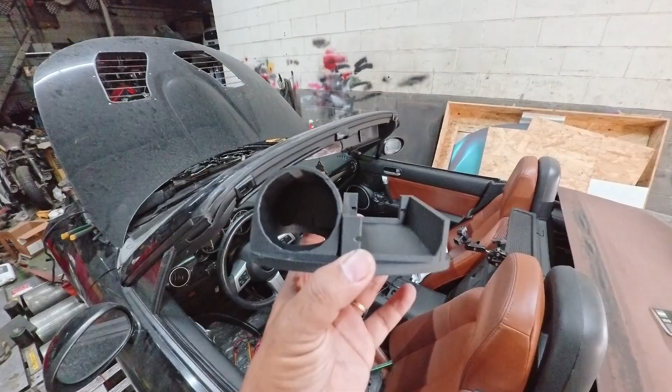Okay, so we have our 3D printed piece here, our prototype piece. Now, I do have a little bit of bad news. I did this all off camera already. And it's nothing too major here. So first I'm gonna tuck these wires down really quick here.

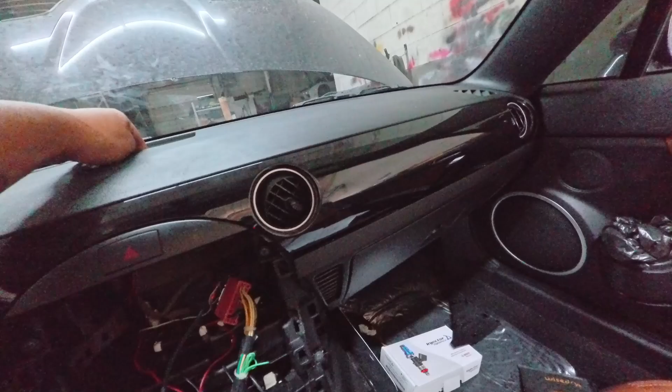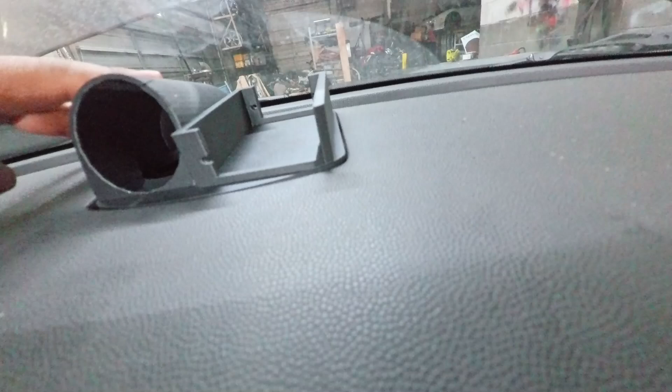And you can see that our base plate fits perfect in terms of the gap there. And I think we need to make it just a hair bigger. And the reason why is that if we make it a hair bigger, we can just kind of do a press fit here on the base.

So I think if we increase it like 0.5 millimeter all the way around, or at least just the sides, like this side and this side, we should be able to just kind of press fit this guy down. Because like I said, the last thing we want is when he's driving for it to do this number here.

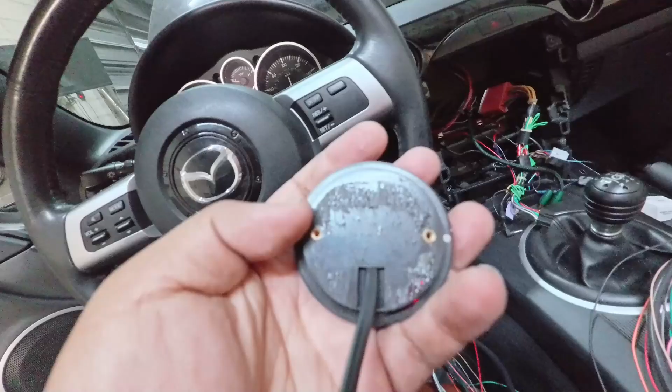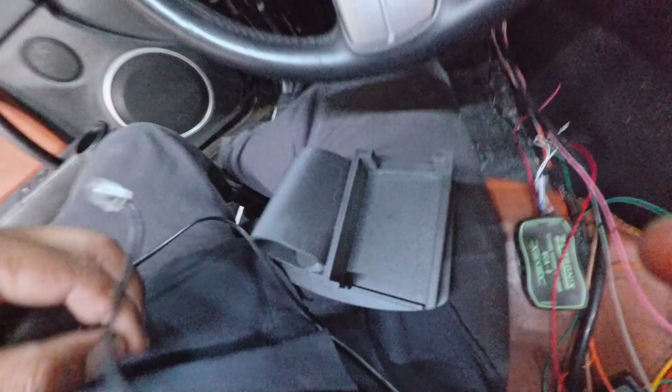The next thing is that what I did not account for is the stupid gauge itself. So the gauge itself has like a slight rise here over the face, and I've actually already broken our 3D print, unfortunately. I was hoping that I would have enough space to kind of massage it. So let me get this pulled in here, so you guys can see it for yourselves.

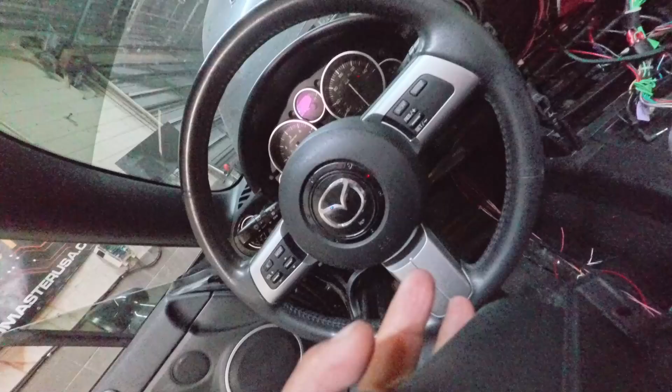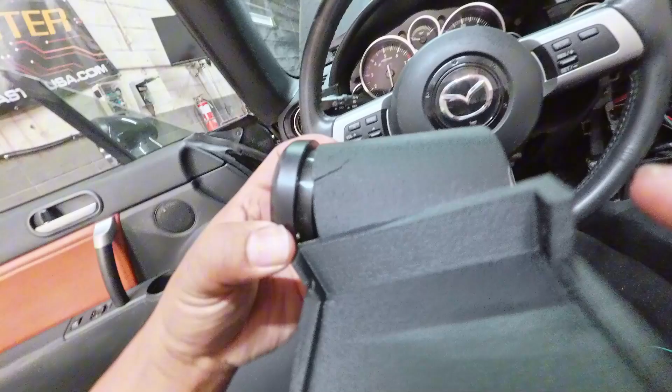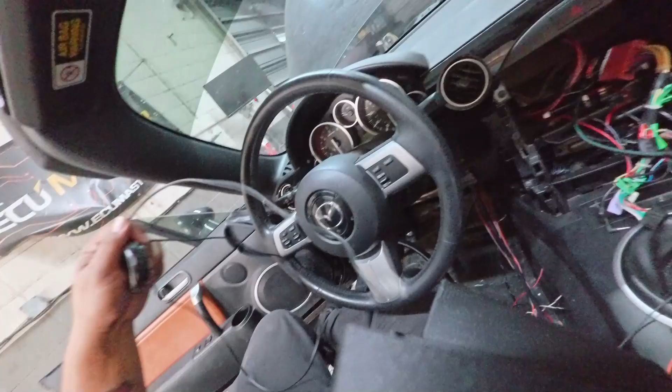And this is essentially what happens. So because this little bezel here sits basically right against this, we can't really get it to fit. See it? So I tried to jam it in there, knowing that I wouldn't have enough space, and I ended up cracking it a little bit. So not a big deal. Kind of sucks because I was hoping this would be good, but you know, it's part of this type of thing. Now the next thing is with the Cortex itself.

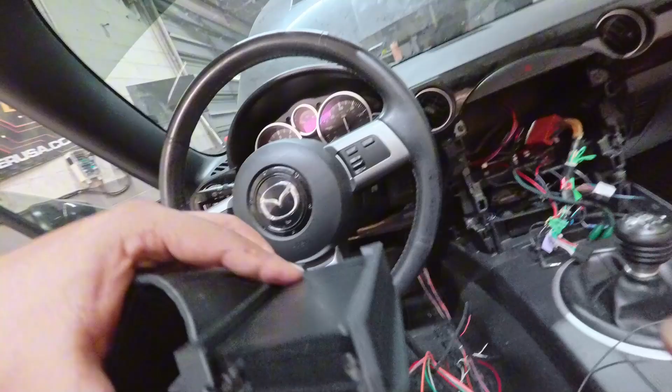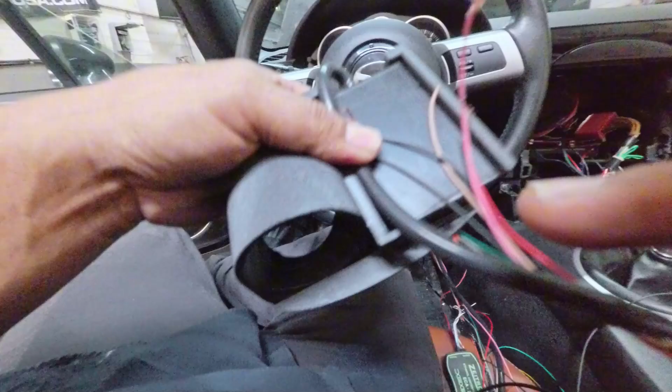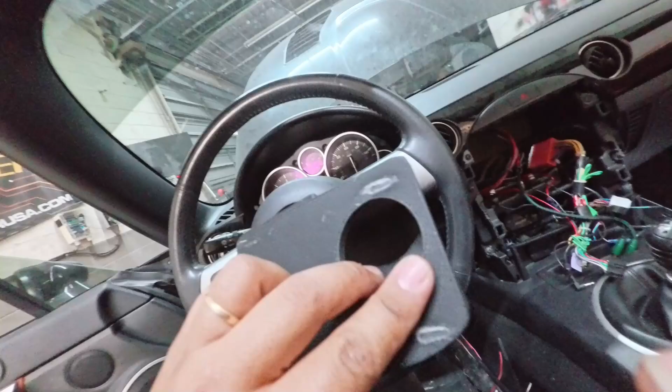So Cortex was actually designed to be a little bit loose, okay? And here's why. My initial thought was I was going to be able to take the hoses and kind of route them around this way. So with the Cortex pushed over completely to one side, I was hoping to be able to run the hoses through here and have a hole made on through here. That way I could feed the wires through the hole. So originally I was just gonna drill that.

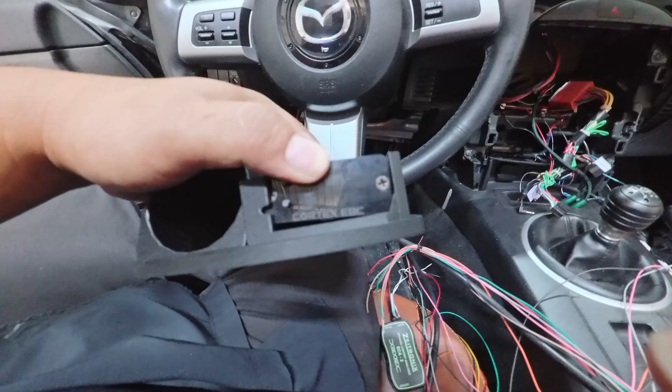The next thing though, is that the Cortex logo was designed to be double side taped, by the way. So I'm gonna raise the bed a little bit. That way we can just have the Cortex logo here. And I'm going to get rid of the screw hole here because it just doesn't look pretty. Originally, I was thinking that I could get a longer screw to kind of unscrew it and then screw it in so it secures in place. But I decided we're just going to double side tape it, and then that'll be that. So, unfortunately, it didn't pan out like what we thought.

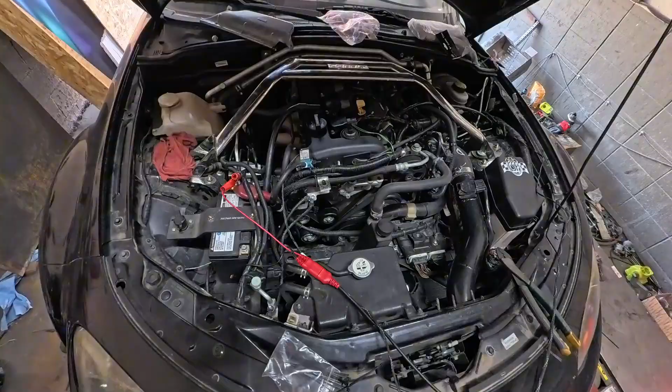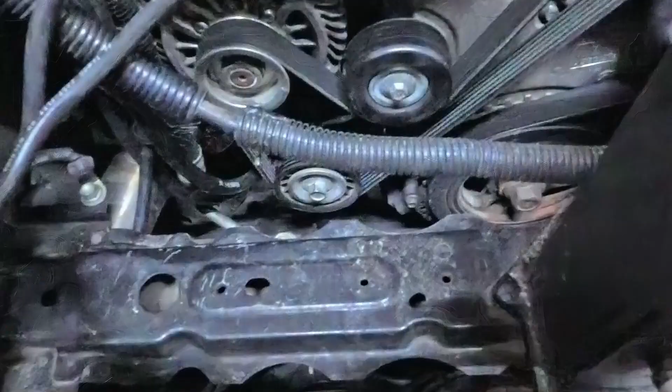So we got the boost control set up, kind of. It's just kind of sitting right here. I've got it zip tied to this harness right here. I don't know if that's going to be the end spot. I think we're going to leave that as is, but I'm just not really too happy about how close these hoses are down here next to the belt. We're probably gonna have to do some routing, check out the routing here.

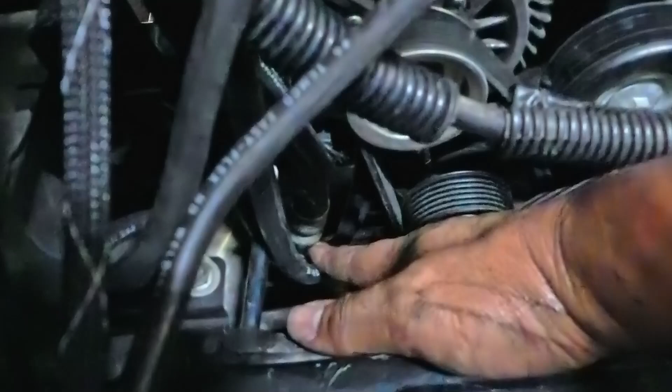So I'm just going to try to zip tie it for now to the AC line over here and see if we can keep it from moving. I'll see if we can reroute this a little bit though, but I'm just not too thrilled about where we can put this. So the hoses are currently pretty long, I think, and hopefully that will give us a little bit of adjustability down the line once we figure out where this all needs to go.

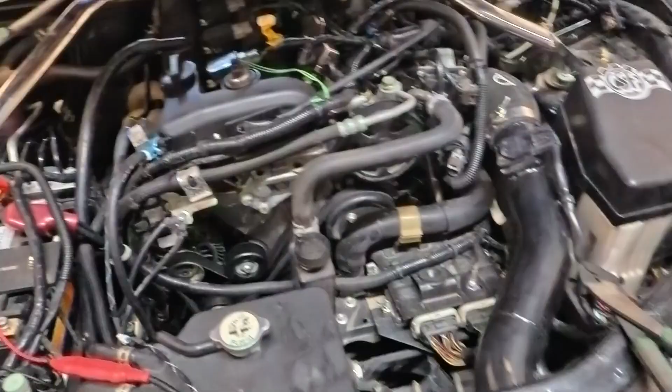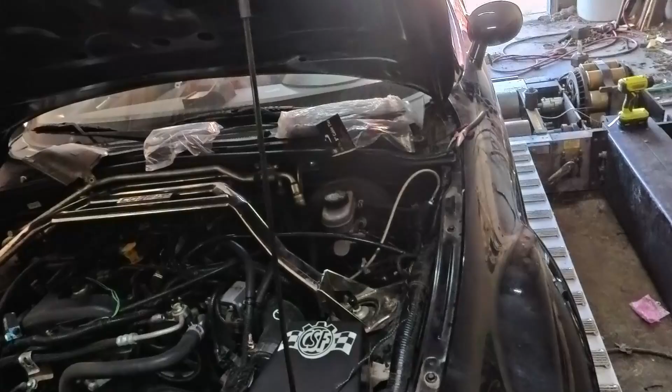I haven't actually fully read the software here, to be frank with you guys, for the Cortex stuff. So I'm gonna go brush up on that before I start doing anything crazy. I did find out that it does have like a boost limiter on it. And the boost limiter, I'm pretty sure, is just gonna cut the wastegate duty cycle to wastegate pressure, which works out pretty good too.

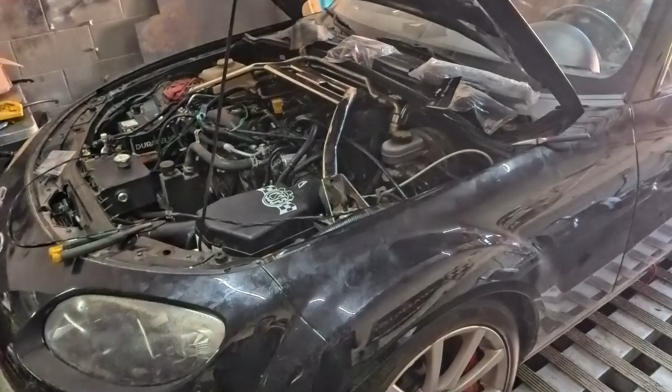I really like that rather than having a hard cut, because what happens, I believe anyways, is that if your boost target is say 20 for instance, and you hit 21, it should just drop the wastegate duty to 0, and then you should get whatever the wastegate is. And on this car it's 11.5, I think.

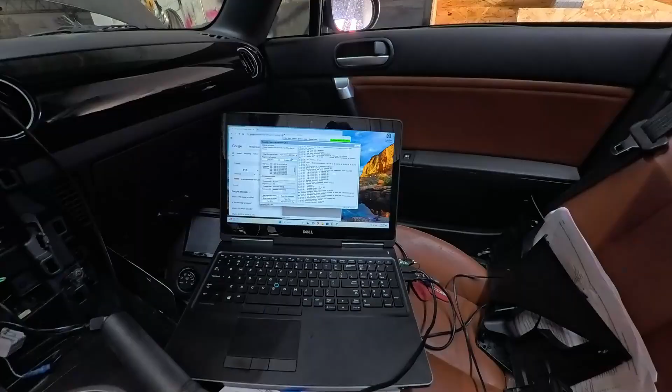But yeah, so hardware wise, it's basically hooked up. I'm going to kind of brush over the manual really quick here. And then if everything goes well, we'll be able to do at least 1 or 2 hits before the day's out. So we've made some changes for flex fuel over here. We're gonna have the EcuTek have a boost limiter as well, just to be on the safe side, since we haven't messed with the Cortex stuff just yet.

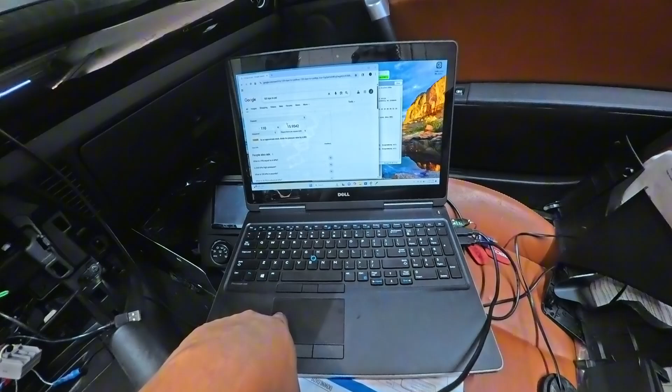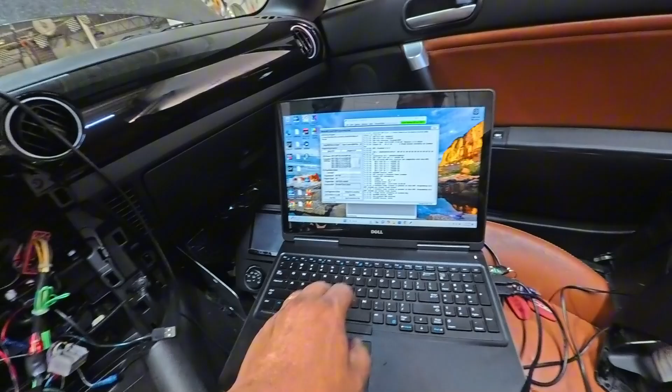So I have it set at 16 psi essentially. 16 psi is what we should be targeting, and then we actually have our boost cut at like 17 psi. So we have our boost cut at 120 kPa, which works out to 17.5 psi. I do also have the failsafe set up here as well, so if it exceeds 15 psi, it should drop the duty cycle back down.

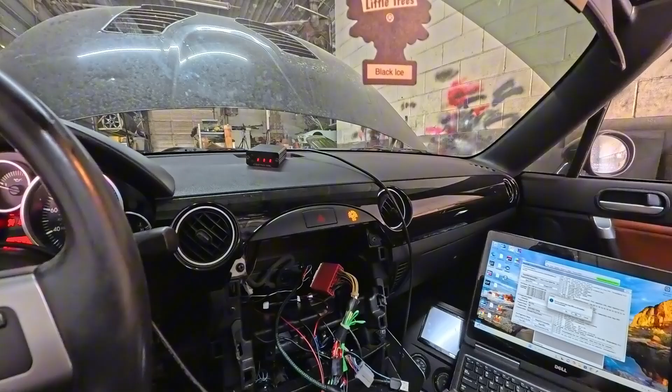So right now we have the wastegate duty cycle to add just 20% duty, and it shouldn't even make that much of a change. Now the wastegate spring is, I believe, 11.5. So at this point, we're adding 20% duty. Let's see what it nets us, and then we will be logging on both sides. So we'll log over here, and we're going to be logging on the EcuTek side, and hopefully everything works out pretty good.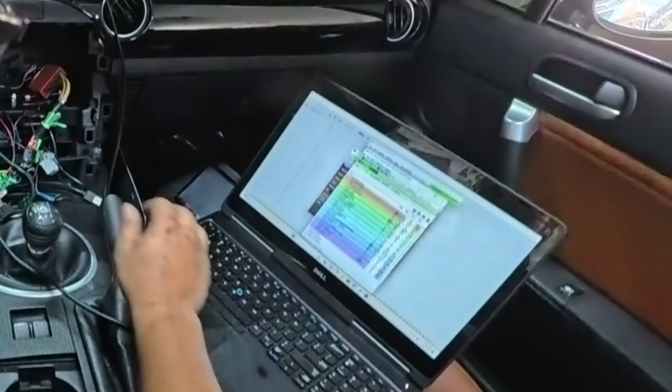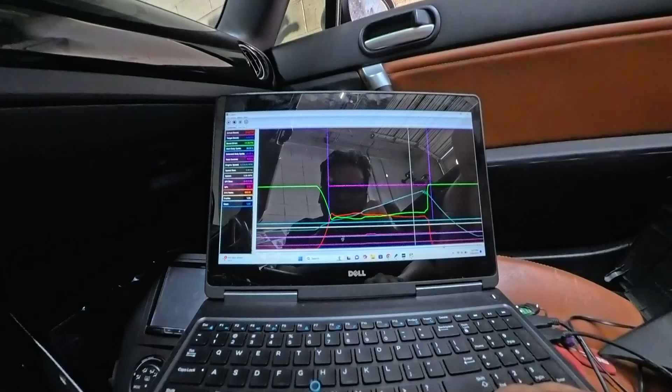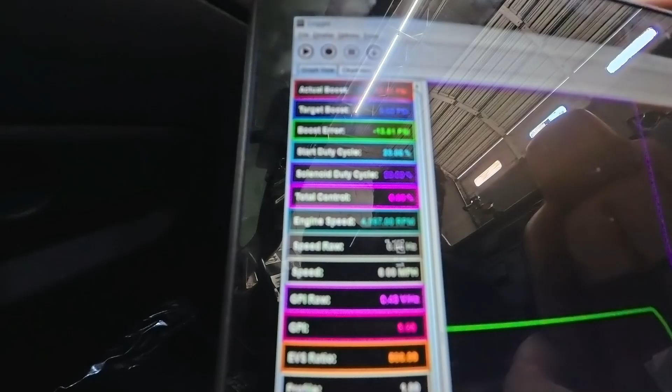All right, so we're not looking for power right now. We're just looking for boost control functionality. So what we've got here is that we're running 20% duty cycle all the way through. Right now we're in open loop. We're just trying to get this dialed in. We're trying to hit 15 psi. Right now I think our max was like 14. So we're getting more boost than where we were at before. That's obviously not uncommon here because we're turning it up.

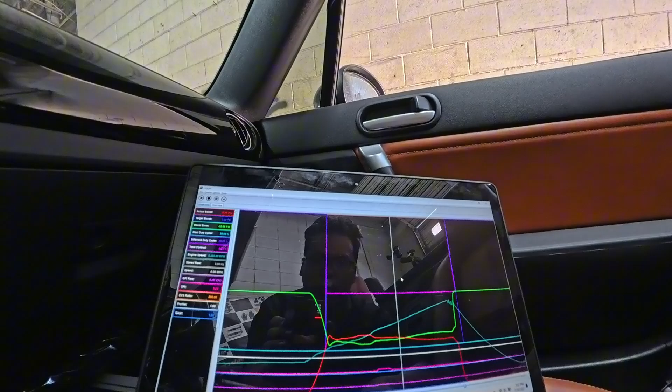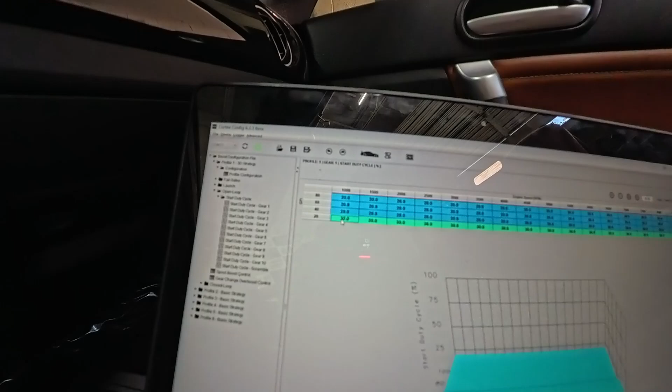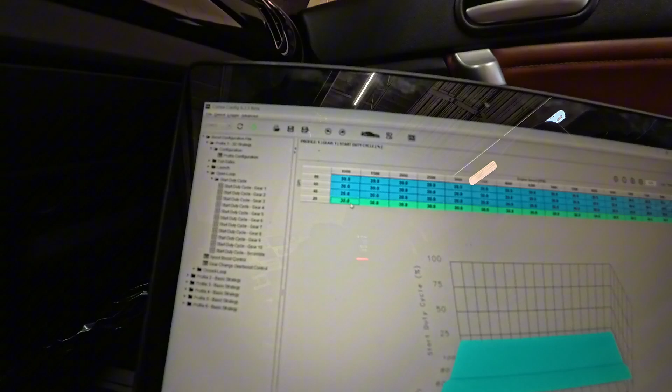So we've added 10% more to give us a 30% total. So if you look here, we've added 10% more duty onto this table here. On the left hand side, this is our ethanol content. So E20 and below, which we're obviously at E10, it should only add 30% duty cycle. So I've already flashed that back on. We're gonna give that another shot.

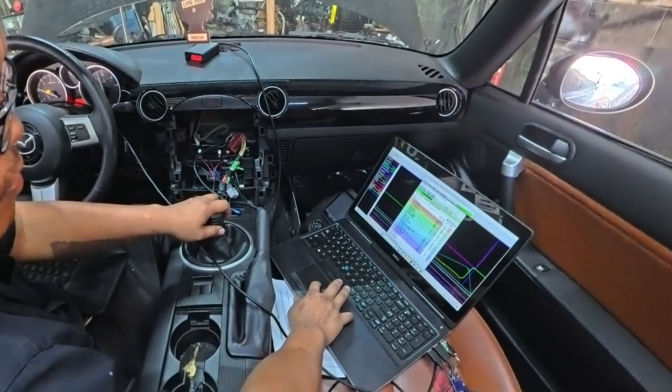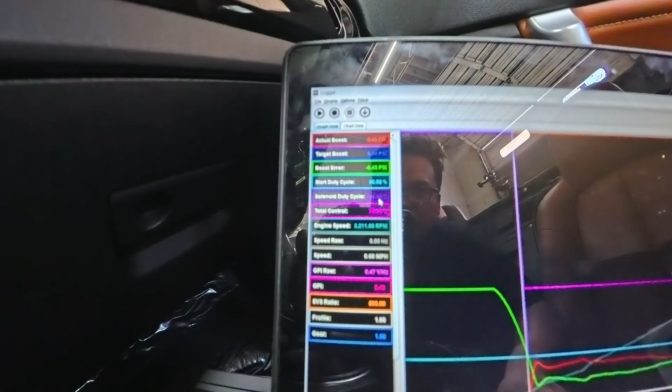So that last run netted us about a peak of 14 psi here. What's really cool about this boost controller is that it'll add 100% duty to the boost controller until you see, I have it set for about 10 psi, I think, because the gate again opens at 11.5, and then once you cross that 10 psi threshold there, you'll see that the wastegate duty drops to 30%. That's what we're asking for.

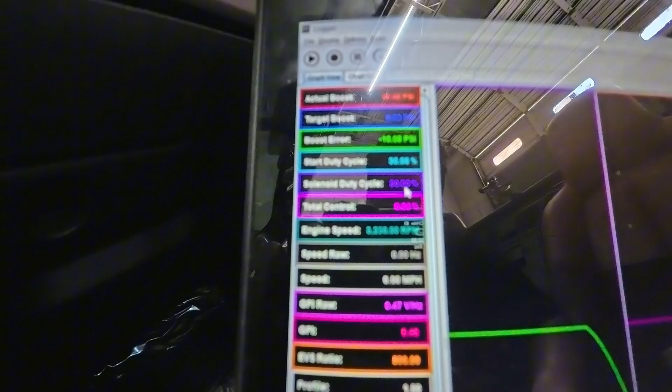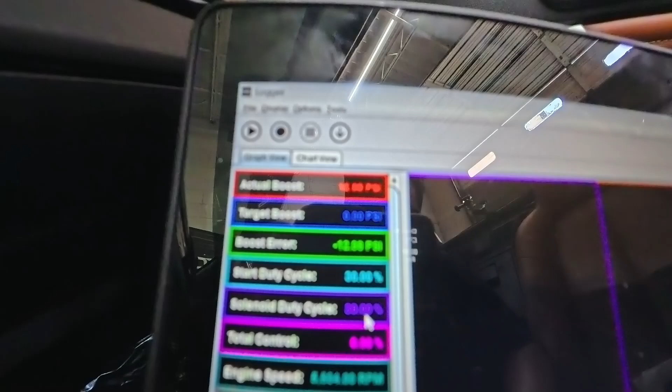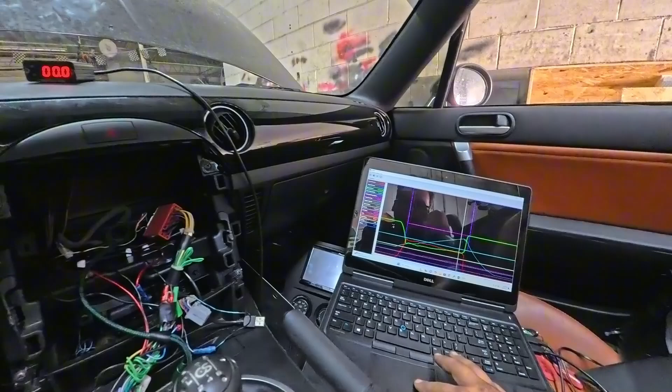And according to the boost controller, we were able to get 14 pounds of boost out of it. As we get up closer to the red line though, the boost starts to drop off, which is pretty common for internally wastegated cars. So we are in fact making more steam, but we're still not quite there yet. So I'm gonna add another 10% duty, and let's see what that's going to net us here.

All right, so we've turned the duty up 10% now. So we're a total of 30% duty on the boost controller now. So we're gonna see what we net in terms of boost.

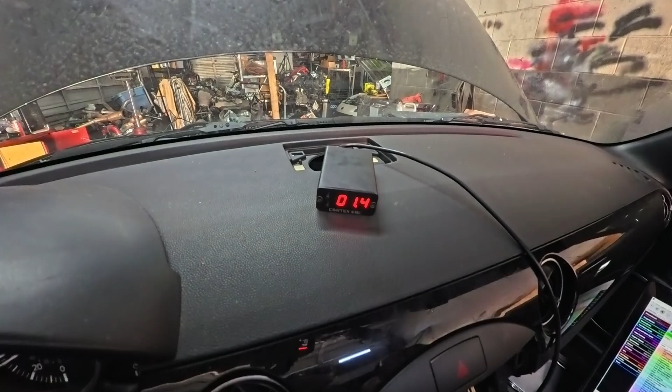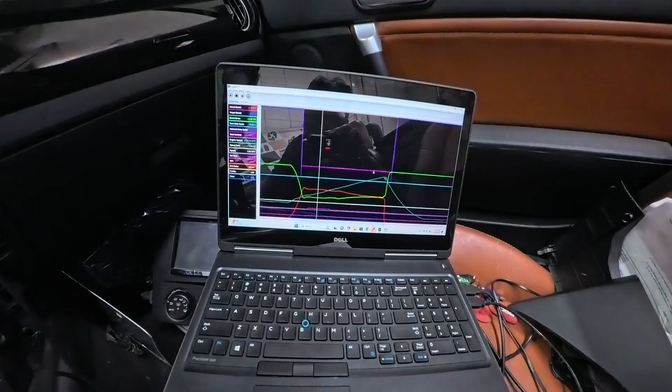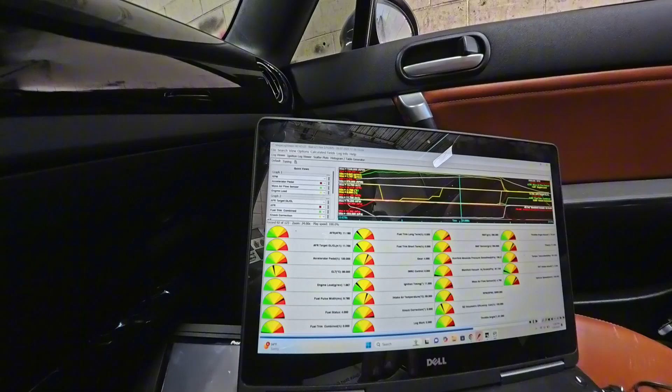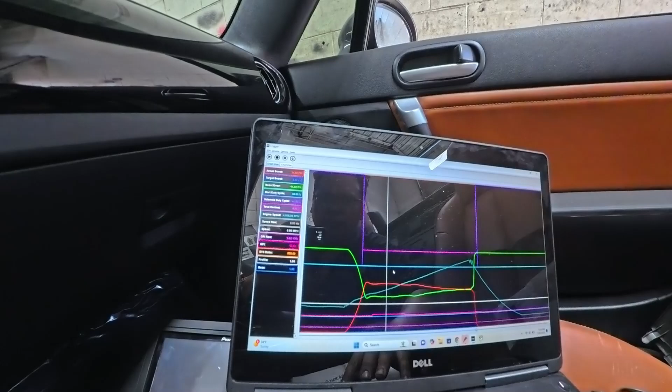All right, so as you guys saw, we got 14.5 psi here, and that's exactly what we were seeing on the Cortex side of it. We saw that at 4,000 RPMs, and it started to drop off by 5,000 RPMs, which again, internally wastegated type things. In terms of the ECU though, there's a small discrepancy between the two. Let me double check here. So 4,000 RPMs on the money is basically where we saw the most boost.

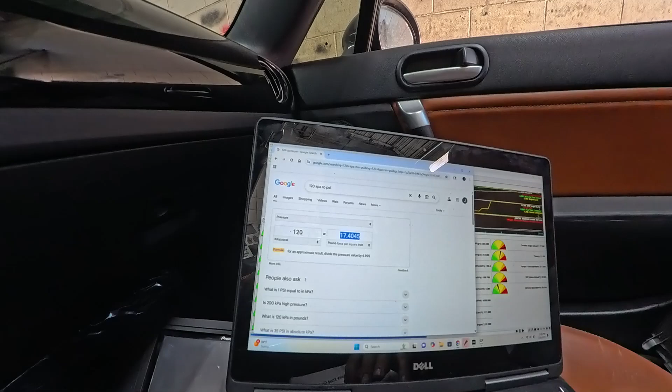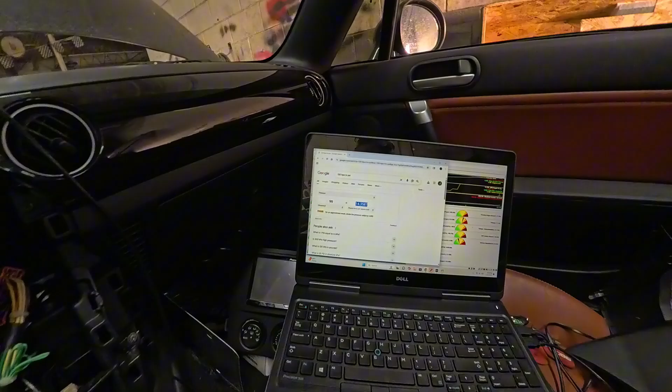So let's take a look at what we got here on the data log right at 4,000 RPMs. Okay, so 4,000 RPMs here has netted us exactly 99 kPa. So 199, or actually, let's just put 99 here. So it's pretty damn close. So 14.35, close enough. So what we can do now is we can start fine tuning it now that we're getting pretty close in the ballpark here.

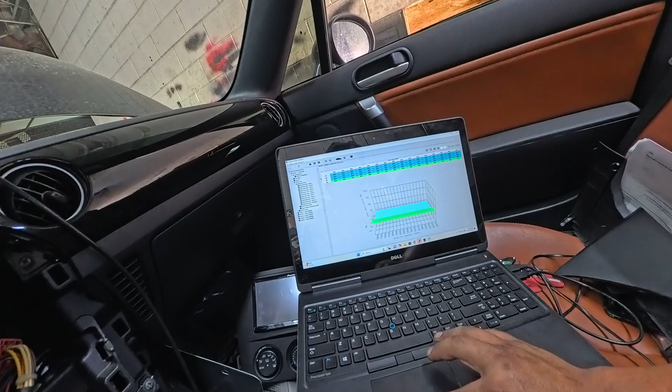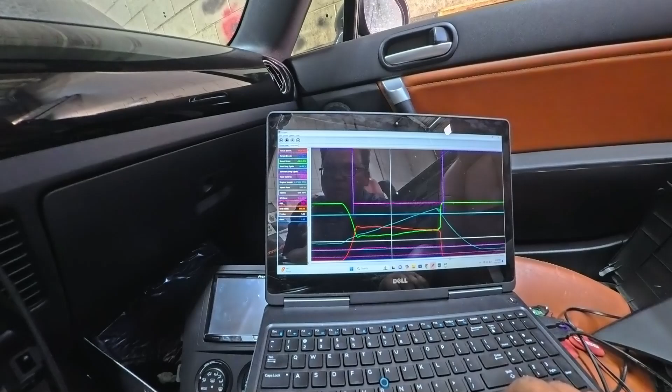What I'm going to do though is we're basically going to add another 5% to this bottom row here to put us at 45. And so what we'll do though is take a look at this log here, and we can see boost dipping off. Boost begins to dip off at basically 5,000 RPMs. It starts to taper down. 4,400 is when it starts tapering down.

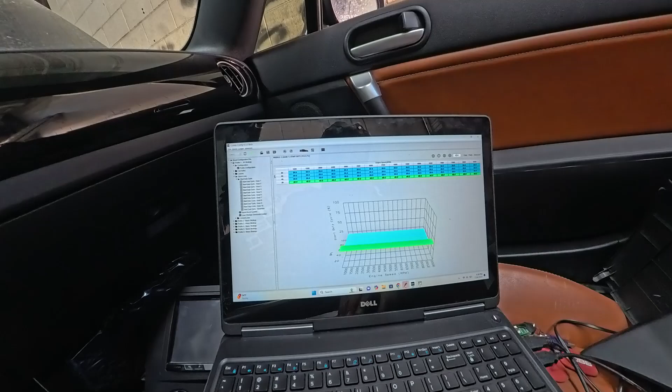So if we were dead set on it, we can essentially add 5% overall. And anything above here, above the 4,500 mark, we can add more duty to it. So let me do that so you guys can see what the graph will look like.

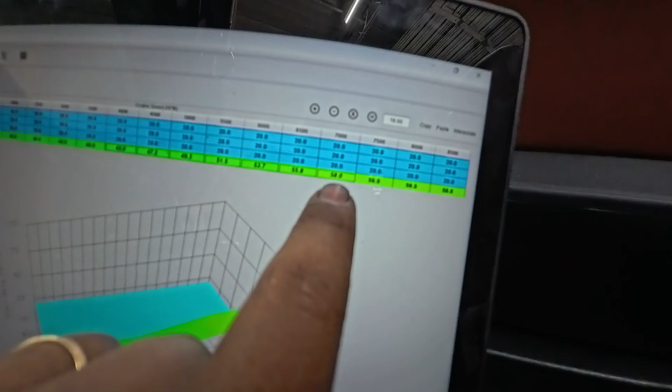All right, so we've added 5% down below, and according to our logs, basically anything above 4,500 it dips. By the time that we get to red line, which is about 7,000 RPMs, we're down to 12.5 PSI. So 1 PSI more than where we were at before. I basically did the difference. So 12.5, our target is 15. It gave me an 18% difference.

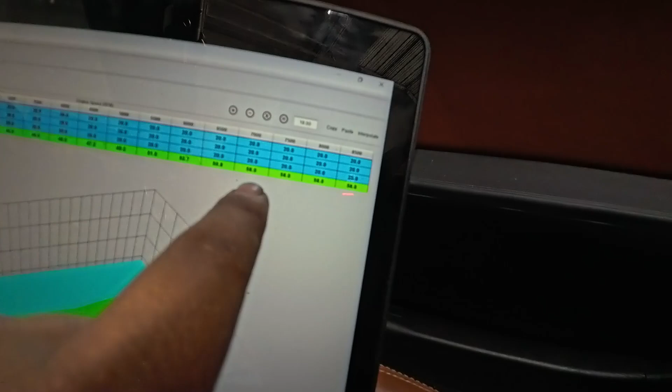So I added 18% here by red line, and then I just tapered it to 4,000 RPMs to give us this nice looking curve down here for this bottom row. So we're going to test that. I'm going to just double check that our failsafe is in fact on for overboost. Activate if your boost is greater than.

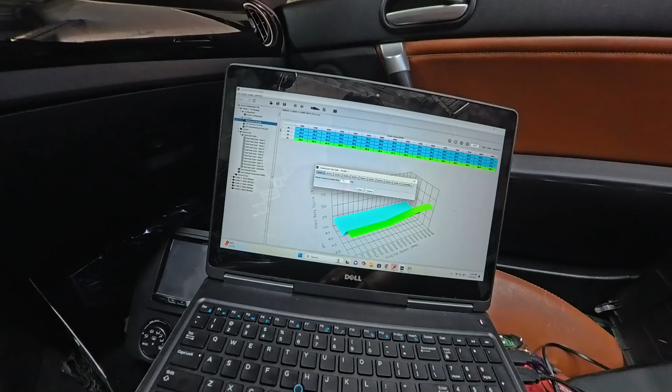Okay, so we're gonna set this up to 17.5. Actually, we'll set this to 16 PSI here because our goal is 15. So yeah, that's basically about it. So if I have enough time, I'll give it another go and let's see what happens.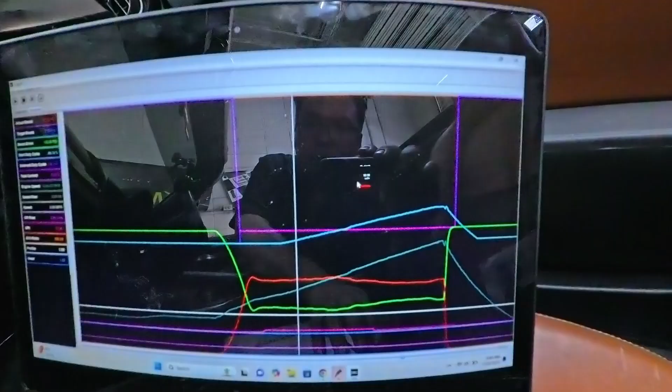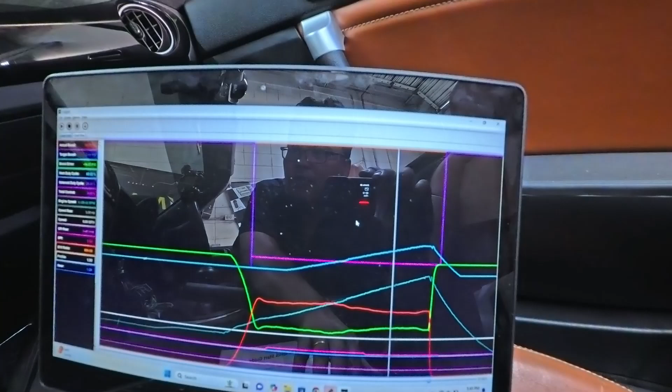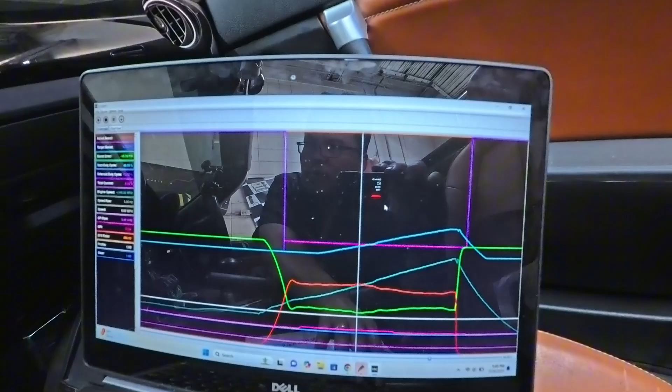So our boost setup is actually pretty close. We're targeting 15. Again, this is open loop mode, so it just runs whatever duty cycle, but it's pretty damn close, right? The highest that I saw was 15.8 or so. Yep. So 15.8 was the highest that we saw, and it was running 50% duty cycle right at 5,000 RPMs. It started to taper off a little bit more, but I think that's good enough, really.

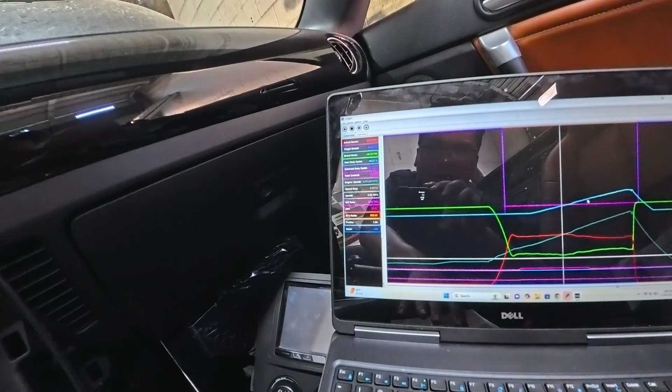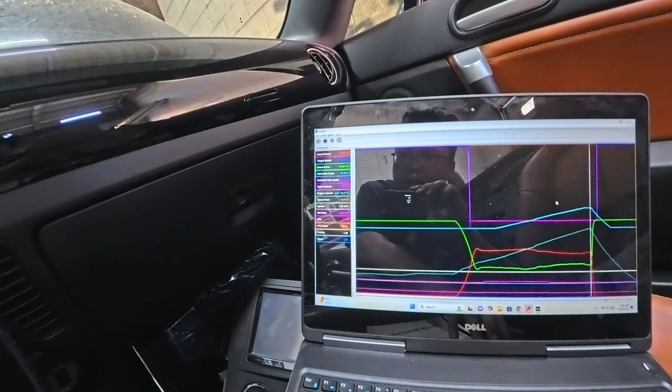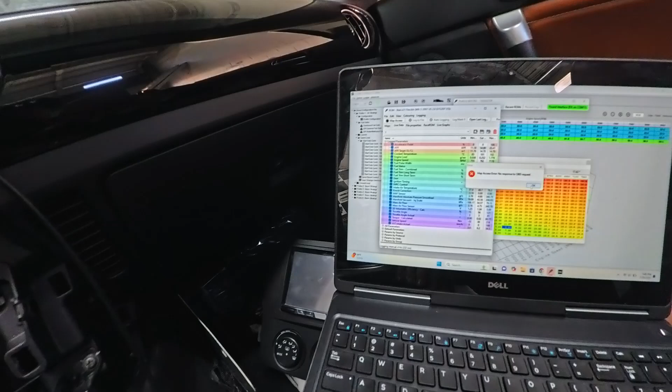So by red line, let's see where we're at. By red line, we were seeing a solid 15.5 PSI or 14.5 PSI. So I would like to say that's close enough. That's within what we want for our target. So I'm going to review over the log now, and we'll see what the log looks like. I think we did see AFRs looked pretty good, so let me review this and see what knock looked like.

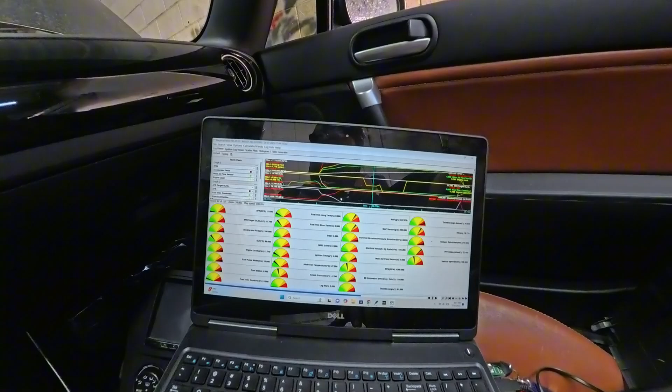So looking at the log, we did see a bit of knock here. The knock did get pretty aggressive here. It took out 3 degrees of timing or so around the 5,000 RPM mark. Not really enough to scare me, but it is enough for me to not push forward. You know what I mean? Where you know that this is a problem, you don't want to push any harder, right?

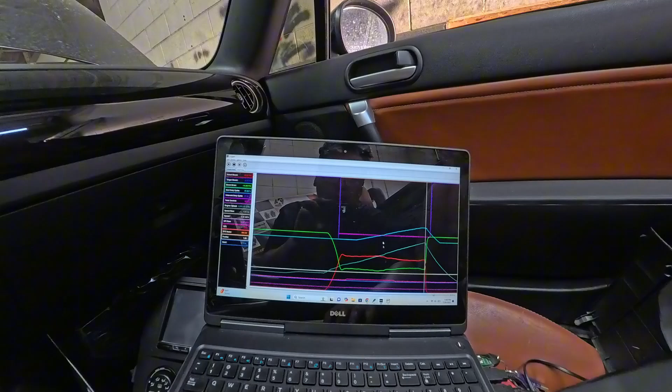So what we're going to do is I'm going to pull a little bit more boost out of it. We'll flash on a map and then we'll test it first thing in the morning. Like I said, it is a little bit higher than we want, by half a PSI or so. So I'm gonna look over this, make a couple changes here, and then we'll save it, and then we'll do another hit, and we'll go from there tomorrow. Overall though, I'm pretty happy with how everything turned out.

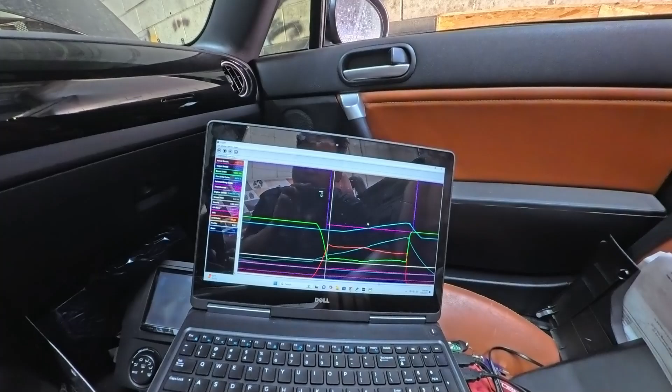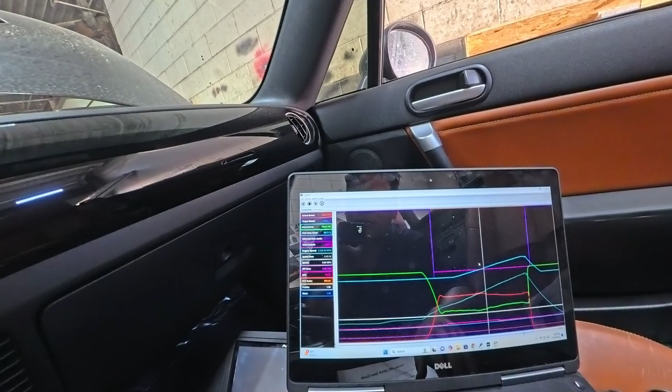So just an idea for you guys, right at 3,500 we started to hit boost pretty hard. So at, let's see here, 3,500 all the way up to 53. We'll pull a little bit of duty cycle out of that, and then we'll call it good. So I'll make those changes here. We'll write it to the boost controller, and then we'll call it a day.